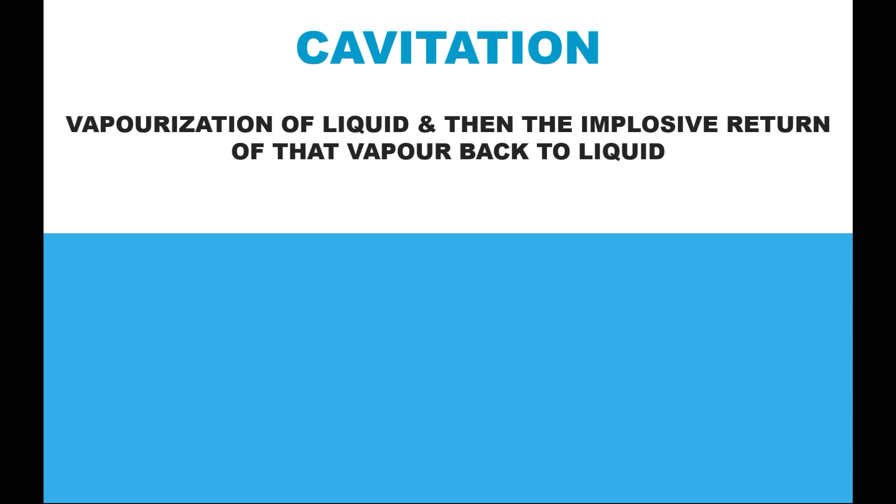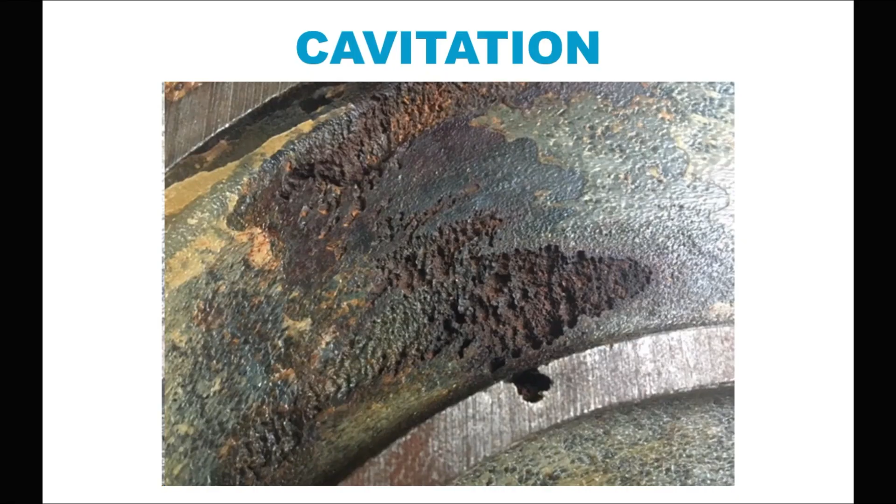Cavitation is the #1 cause of pump hydraulic noise. You may have already heard and seen the effects of cavitation, but what is it? Cavitation is the vaporization, or boiling, of a liquid and then the implosive return of the vapor back to liquid. Contrary to popular belief, cavitation is not caused by air bubbles. Here is a vapor bubble collapsing back into liquid. This change in state produces pressure waves of several 100,000 psi and causes damage to any nearby equipment or components.

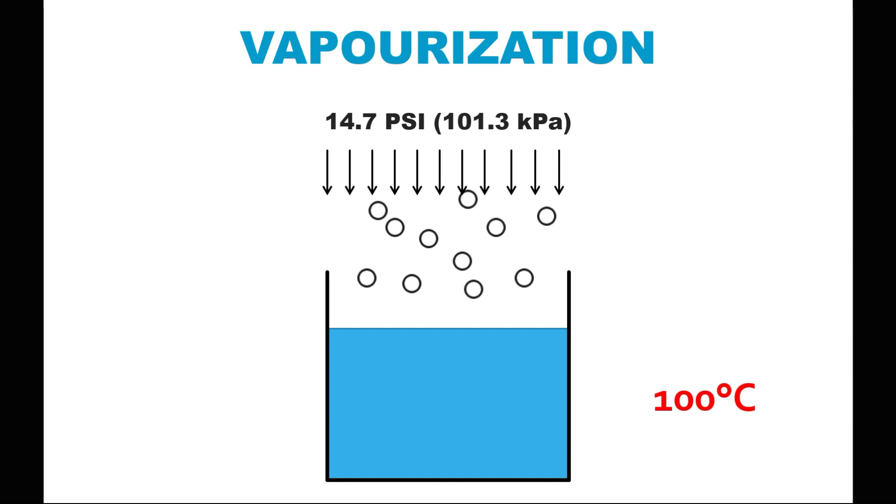If we are to study cavitation, we must understand why the liquid vaporized in the first place. Let us consider a bucket of water at sea level. There is enough atmospheric pressure being applied to keep the water in a liquid state. We would need to increase the water's temperature to 100 degrees Celsius or 212 degrees Fahrenheit in order to raise its vapor pressure to that of the atmosphere. At this point, the water would vaporize or boil.

If we were now to move the bucket of water up a mountain 2,000 feet, the atmospheric pressure would reduce to about 13.7 psi. Now, we would only have to raise the water's temperature to 98 degrees Celsius to induce boiling. So, as we reduce the pressure on a fluid, the boiling point temperature also is reduced.

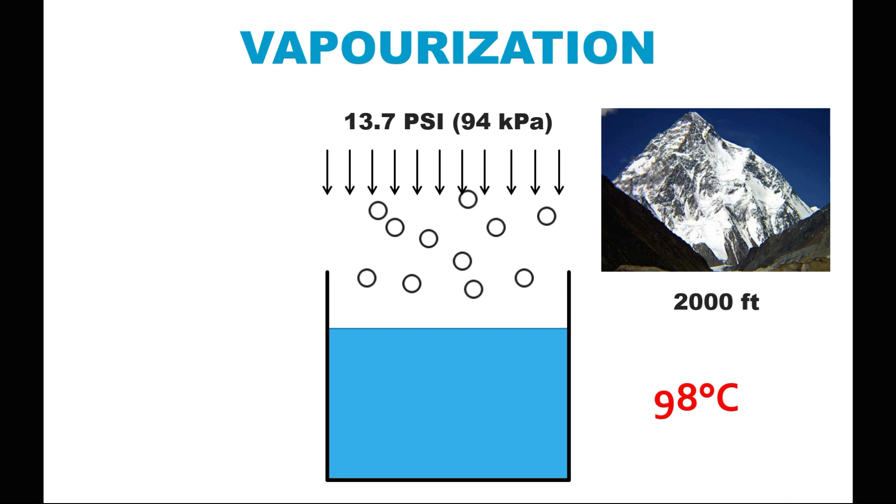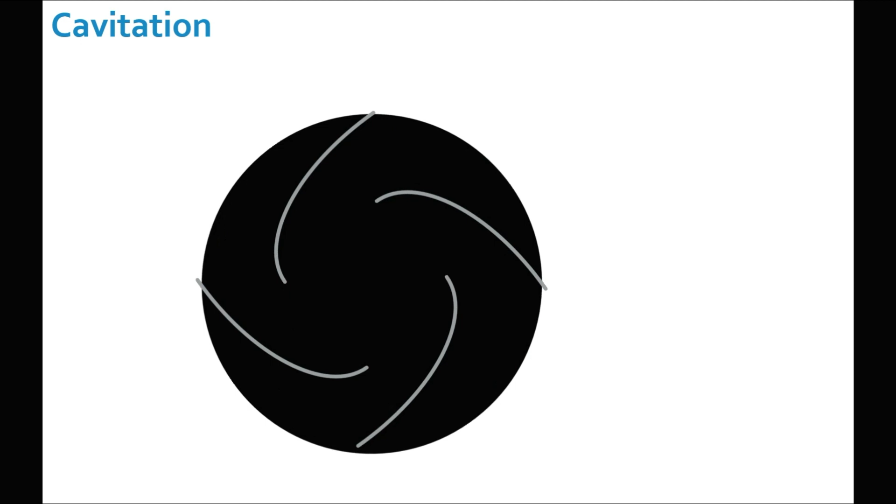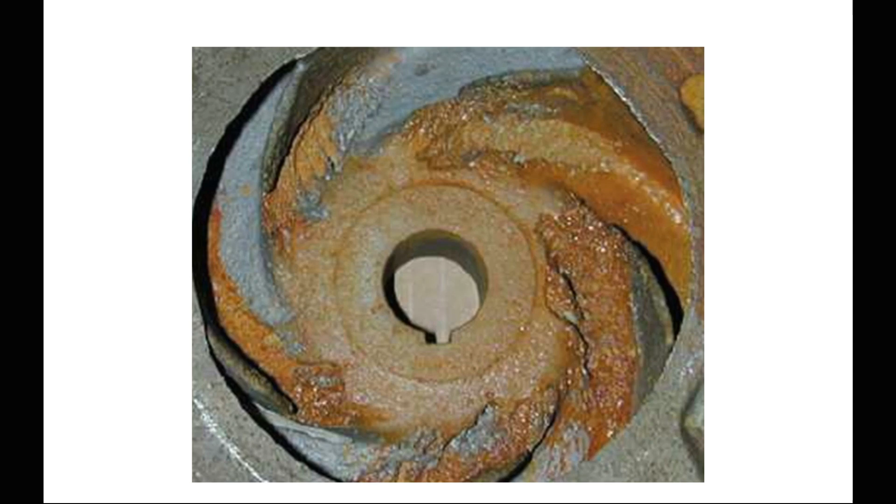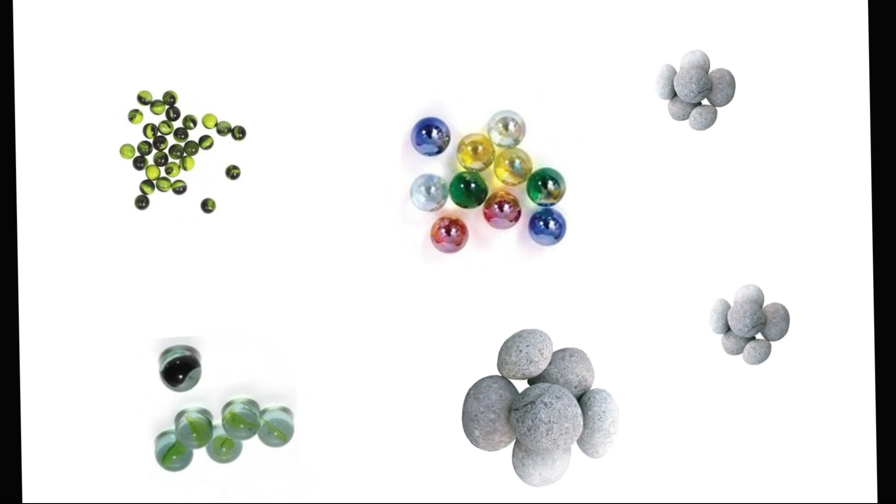Let us now turn our attention to pumps. If the pump draws too much vacuum, the fluid may vaporize or boil at the center or eye of the impeller. These vapor bubbles are then pressurized as they are thrown internally across the impeller. This causes the bubbles to violently collapse back to fluid, sending out pressure waves that damage the center region of the impeller. The damage can be very severe, as shown here. This is called suction cavitation. It sounds like gravel or marbles are being pumped.

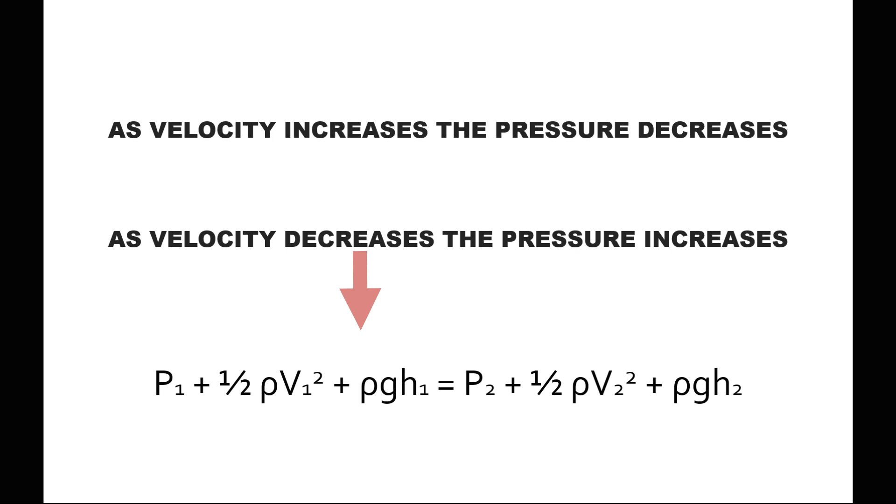To avoid suction cavitation, an NPSH calculation has to be performed. This stands for net positive suction head. There is another type of cavitation that occurs in centrifugal pumps. To understand this mechanism, we must first review the Bernoulli principle, which states, as the velocity of a fluid increases, its pressure decreases, and conversely, as the velocity of a fluid decreases, its pressure increases.

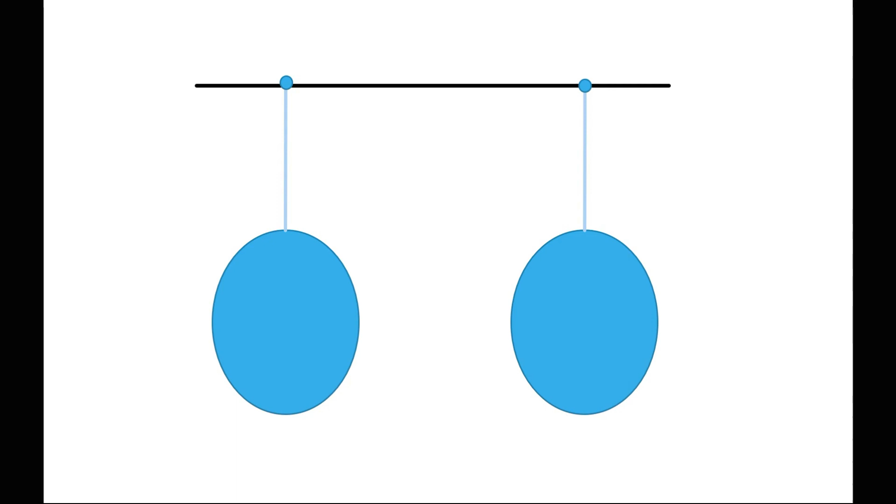Let's take a look at some everyday examples of this principle. As we blow over the top of a piece of paper, the pressure drops, causing the higher pressure below to push the paper upwards. Here is another example. If we blow between two suspended objects, the pressure will drop and the objects will be pushed towards each other.

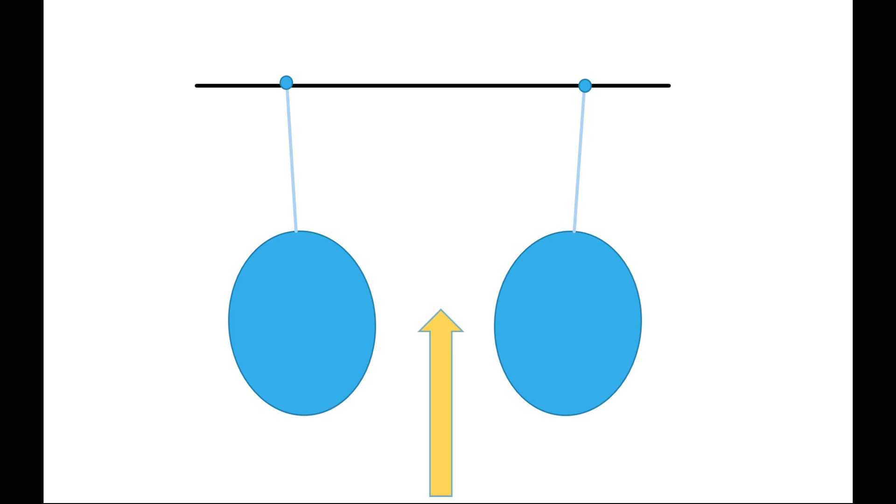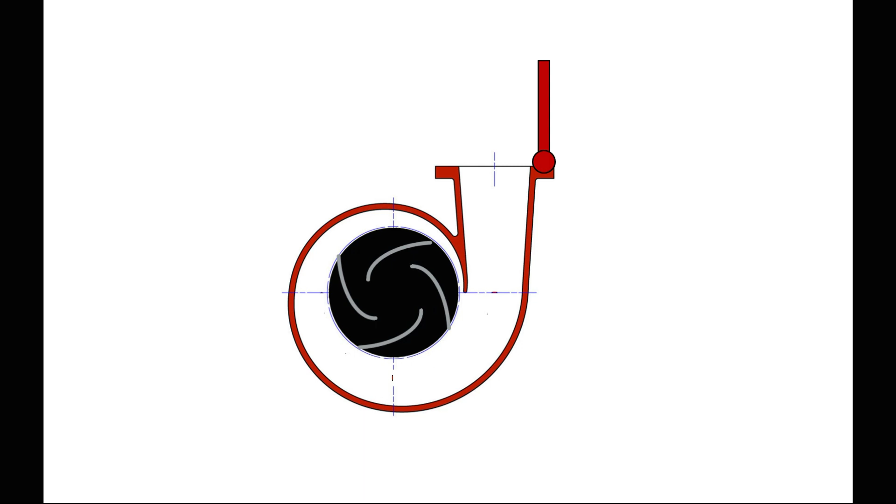Now let us turn our attention once again to centrifugal pumps. Here is a view of the inside of a typical centrifugal pump. The liquid being thrown outward by the impeller creates a low pressure at its center. This aids in allowing more fluid to be pushed into the pump from the suction piping. The fluid is energized by the impeller and is directed out the pump nozzle by the volute cutwater.

If we were now to increase the back pressure on the pump by partially closing a valve, what would happen? We would induce a partial recirculation of the flow back to the impeller. This recirculating flow would induce turbulence. Or put another way, localized high velocities in the fluid stream. If these velocities are great enough, the pressure may drop below the fluid's vapor pressure.

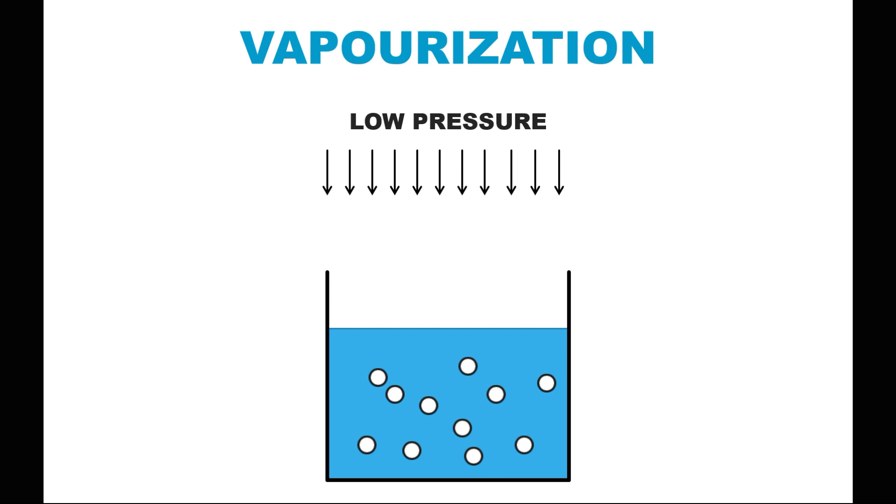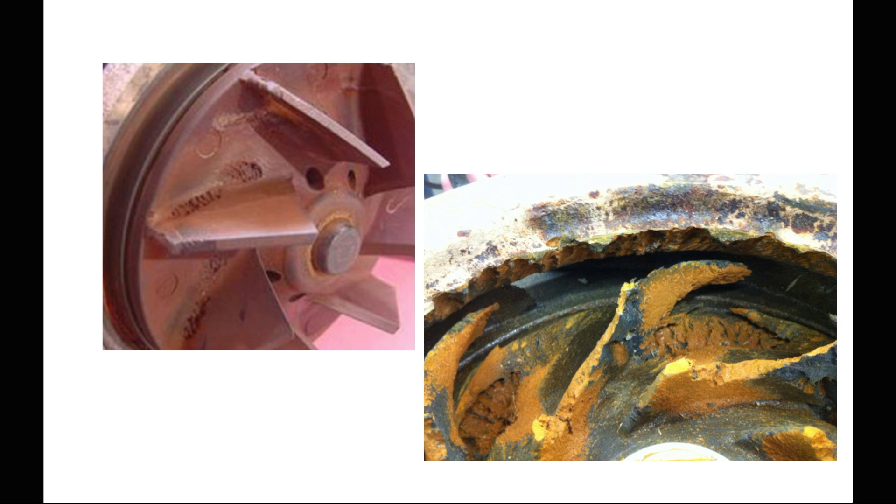Obviously, this would cause the fluid to vaporize. As these vapor bubbles travel back into higher pressure regions, they will collapse back to fluid, creating pressure waves. We will see the resulting damage on the outer portion of the impeller vane. This is called recirculation cavitation.

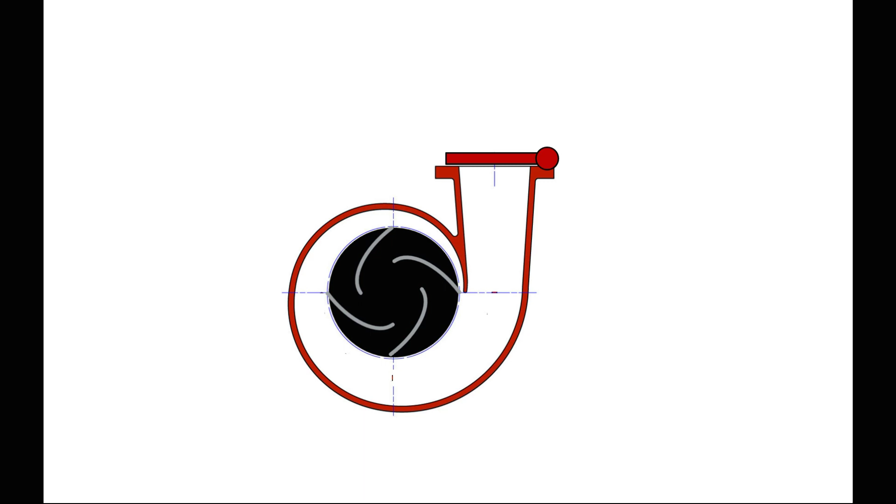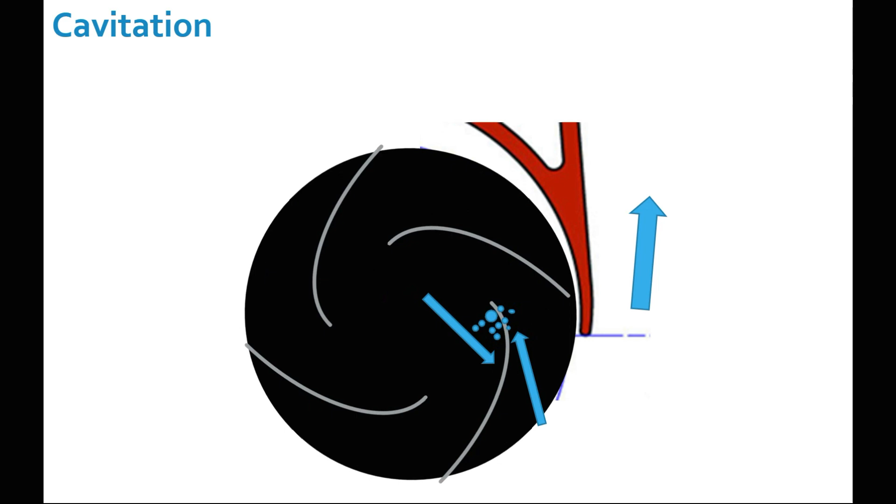What if we were now to shut the discharge valve completely? This is called taking the pump to shut off. Please be warned, this is not a good operating condition for any pump and can be extremely dangerous. Please consult with the pump manufacturer before performing this test. This shut-off condition causes high pressures to be developed at the discharge of the pump. This will induce similar recirculation cavitation as before, but now the pressures are much higher.

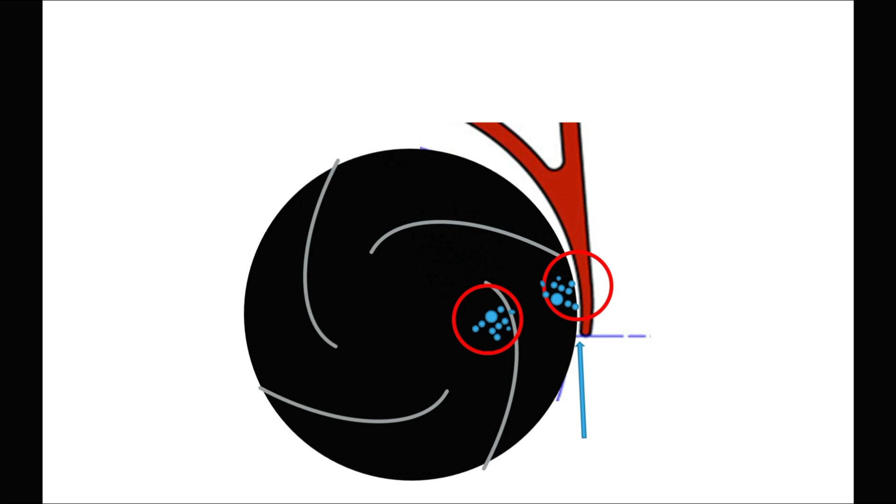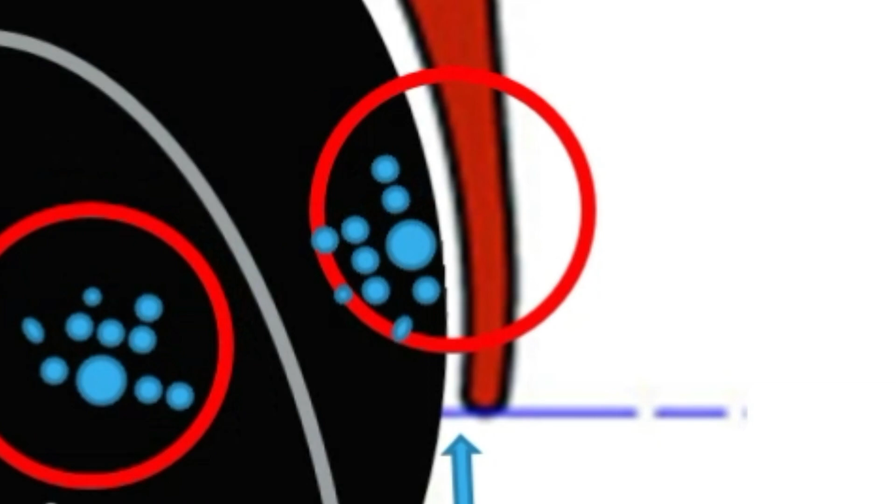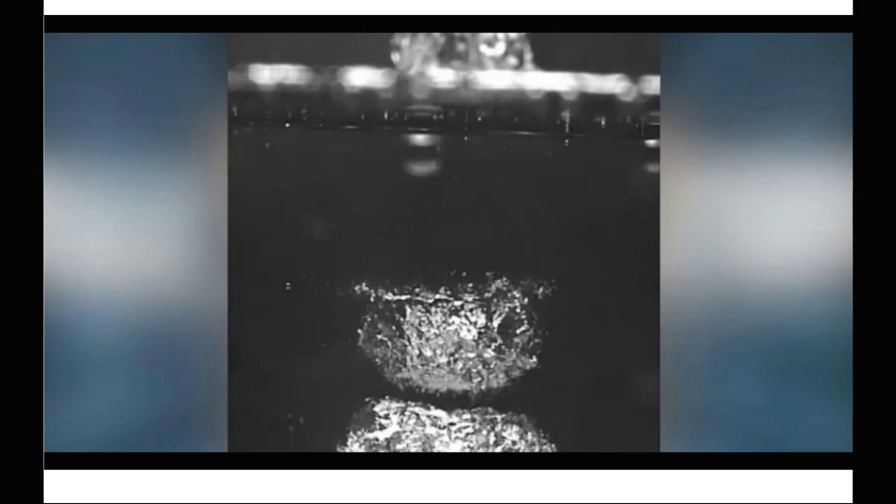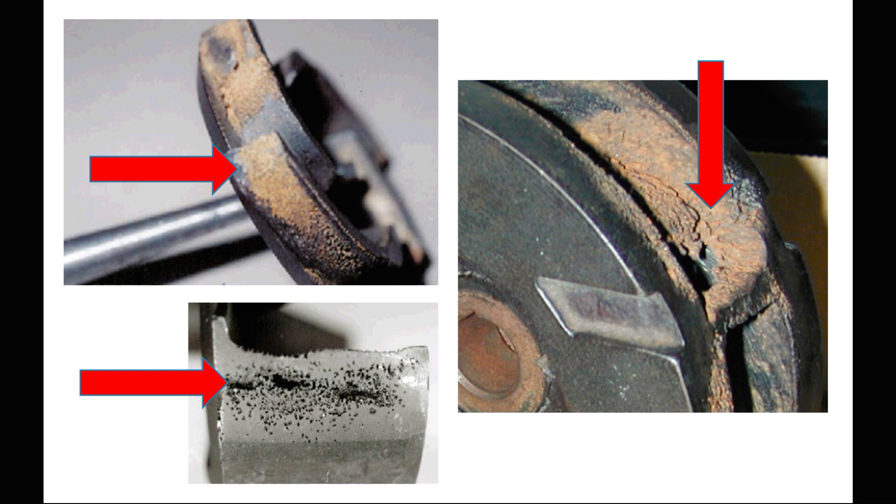This causes the fluid to find an additional flow path to recirculate back into the impeller. This path is between the impeller tip and the cutwater of the volute. The localized velocities in this region again can become high enough to induce a pressure drop below the vapor pressure of the fluid. These vapor bubbles form and then collapse as they travel into higher pressure zones. This is called discharge cavitation. The damage can be seen on the outer tips of the impeller vanes and on the cutwater of the volute. Note, when discharge cavitation occurs, recirculation cavitation will also be present.

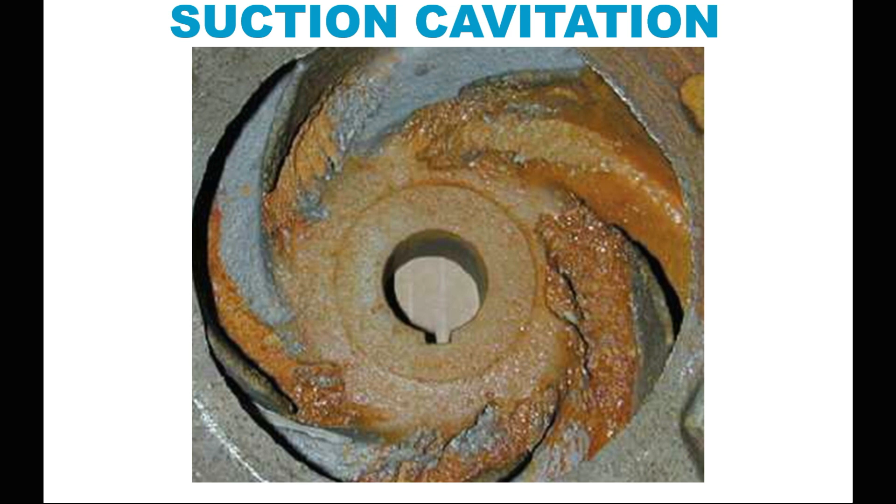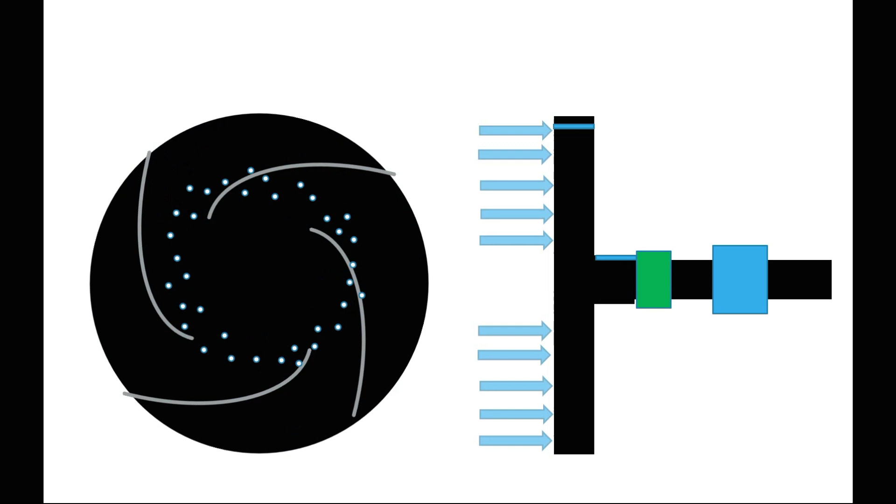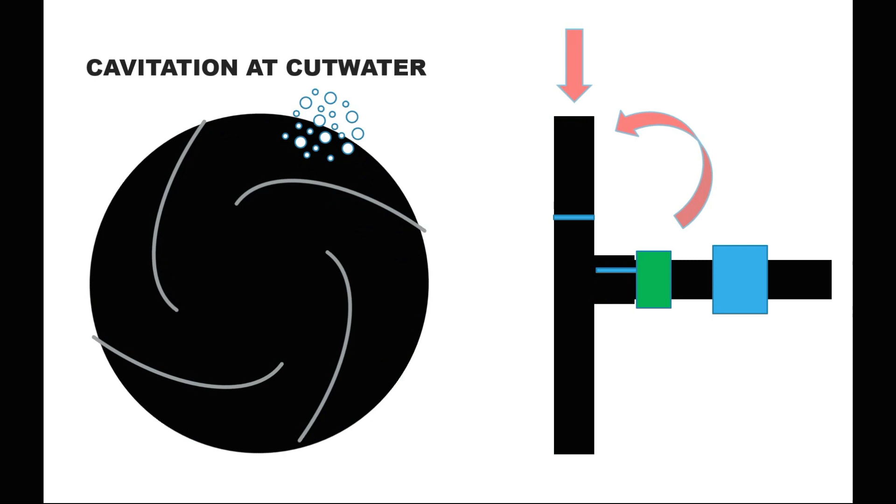Let us now compare these types of cavitation with respect to the damage inflicted on the pump. First, suction cavitation. This damages the center or eye of the impeller and tends to send the implosive shock waves down the length of the shaft. Now let us look at the recirculation and discharge cavitation at the same time. The recirculation cavitation occurs some distance from the center of the impeller, which causes a bending moment on the shaft. The discharge cavitation occurs on the impeller vane tips and again sets up a bending action on the pump shaft. This is why we often find premature breakage of shafts when a pump is operating under recirculation and discharge cavitation.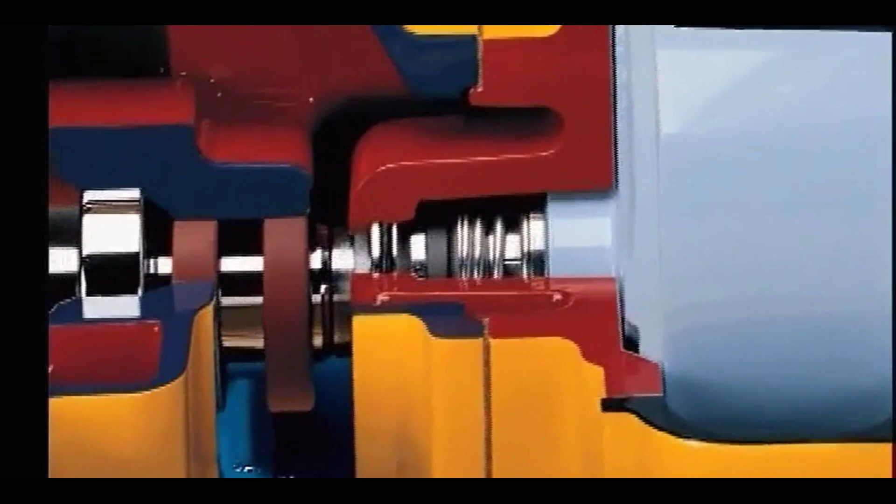Before the shaft does fail, we often see the mechanical seal start to leak as the seal faces flutter under the bending action. Obviously, the larger the diameter of the shaft, with the least overhung dimension, will be most resistive to this bending.